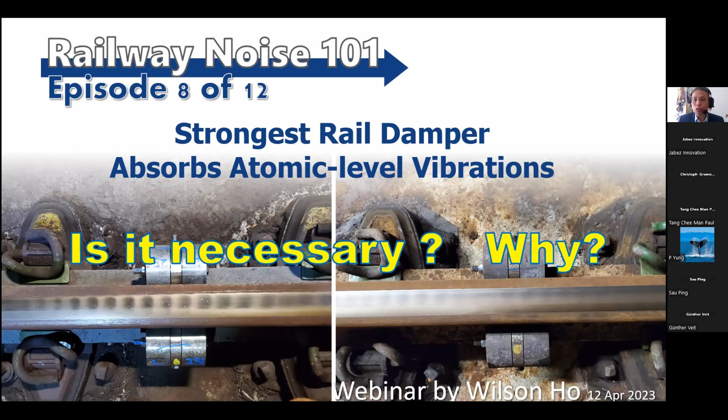It is not required to absorb vibration to atomic level. Nanometer level would be sufficient, quite enough. The real question we want to discuss today is how long it would take to make the rail vibration decay to nanometer level, or how quickly the rail vibration decays. Absorbing atomic level rail vibration would make the rail vibration decay faster.

Before we go into the content page, I want to show some noise data we gathered in the last 20 years, about noise level, undercar noise level, against the frequency of the rail vibration. In general, for noise radiation from rail vibration, we normally consider 400 Hz to 2000 Hz, because this is the major frequency band of noise radiation from the railway.

If we look at how much vibration creates noise level, you could not imagine that even atomic level vibrations already create the lowest noise level, around 30 to 50 dB. Nanometer vibration, talking about 1 to 50 nanometers, the noise level is loud but still acceptable.

Even in the sub-micrometer level, less than 1 micron, it is still acceptable, sometimes up to 1 micron, sometimes not acceptable. But once higher than 1 micron, the noise level is normally too loud and will lead to mitigation.

Before we go on to the detailed presentation, we want an idea of how small the scale of vibration displacement is, in micrometer or nanometer scale. Once it is more than 1 micrometer, the noise level is too loud.

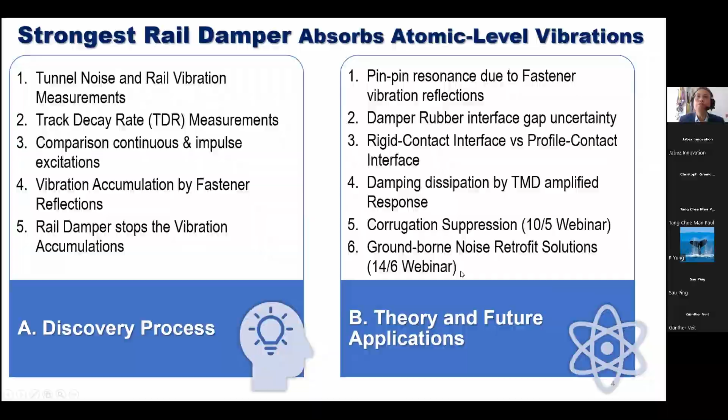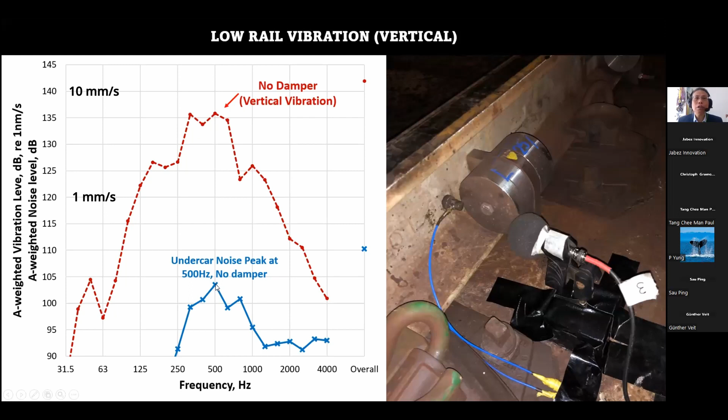This is the noise level, vertical vibration, from the sensor underneath the rail. It has a 135 dB vibration level, and the noise level peaked at 500 Hz. The lateral vibration from this sensor also has this peak at 500 Hz. So we designed a damper to fit on it and tune to 550 Hz for both vertical and lateral, so both vibrations would be damped by this damper.

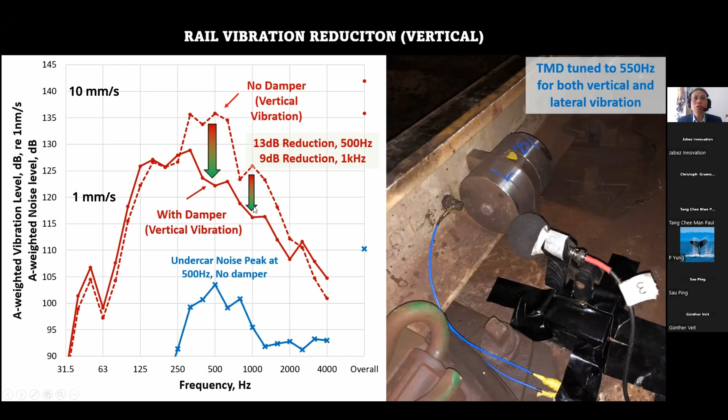Once we put the damper on, the 500 Hz vibration level decreased by 13 dB, and at 1000 Hz it decreased by 9 dB, even though it was only tuned at 550 Hz. For the lateral vibration, at this sensor location, there is a 17 dB reduction at 500 Hz and 13 dB reduction at 1000 Hz.

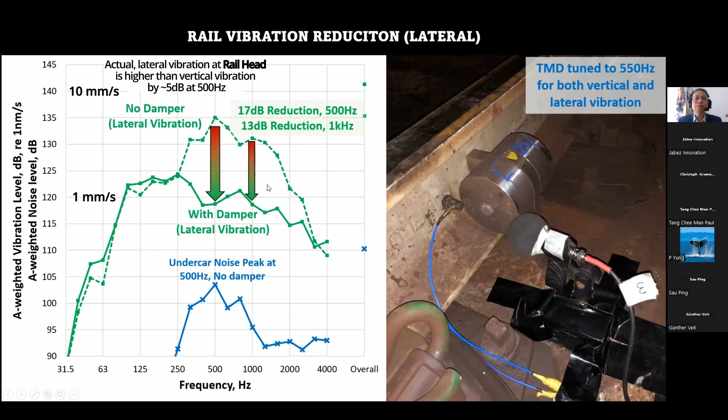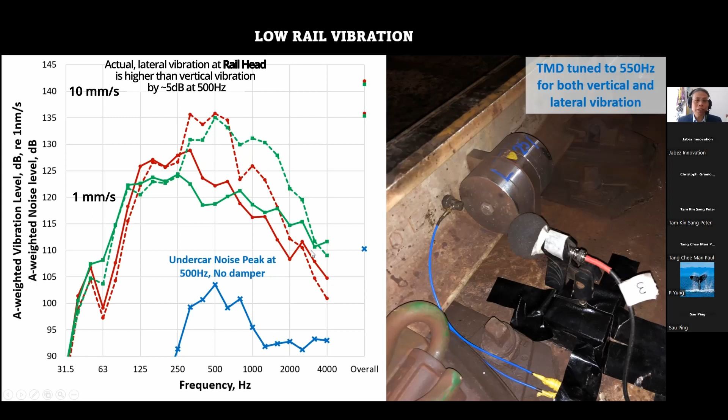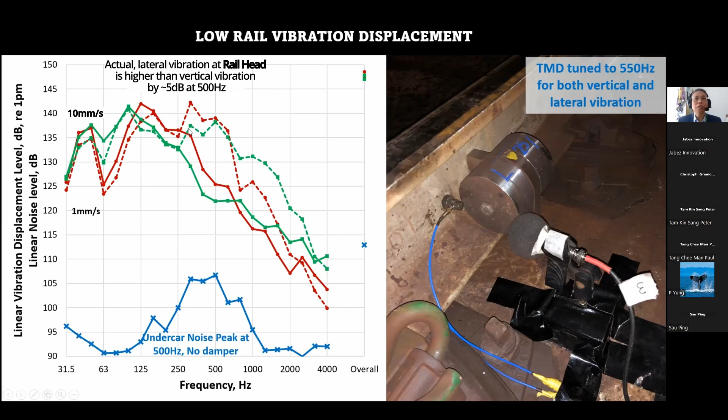This graph is the A-weighted noise level. The vibration level is also A-weighted. We change it to linear weighting, so this is the A-weighted vibration level converted to linear, and we can see in terms of vibration velocity it is quite high. But if we convert it to displacement, this is 1 micrometer, this is 10 micrometers, this may be 25 micrometers. So the vibration level, in terms of displacement, is in the micrometer range.

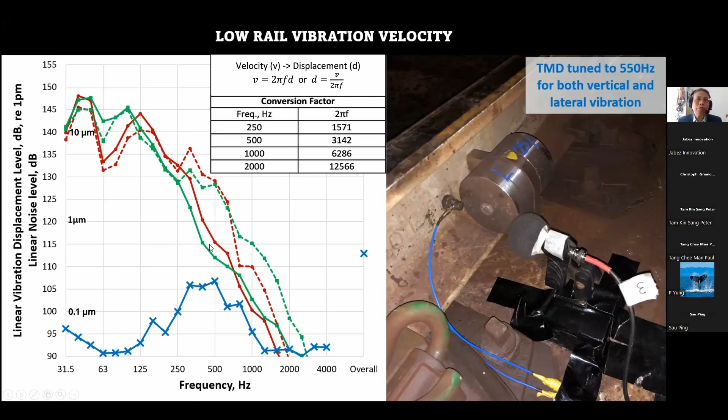If we're only interested in higher frequency, for example 500 Hertz and above, it is normally around 1 micron or less. Before applying the damper, the vibration level is more than 1 micron. With the damper, the vibration level is already less than 1 micron. So this gives you some idea of the scale.

The vibration level in dB can be expressed in displacement, velocity, or acceleration. The equation is very simple: dB in displacement is 20 log the displacement level over the reference level. The reference level is 10 to the minus 12 meter for displacement. For velocity, the dB is 20 log V over V reference, where V reference is 10 to the minus 9 meter per second. For acceleration it is similar.

We should notice that for displacement we use picometer as the reference. For velocity, we use nanometer. For acceleration, we use micrometer. So they are different - this is the practice of the acoustic industry.

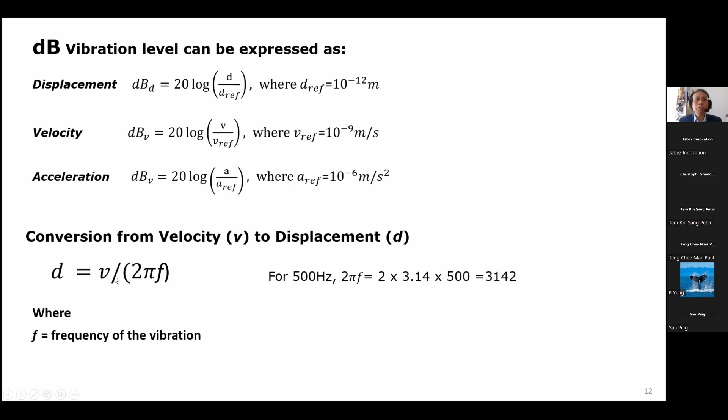Now we talk about how to convert velocity to displacement. If there is a vibration velocity, we just divide it by 2 pi f, then we get the displacement. For example, for 500 Hertz, 2 pi f is about 3100. So once we change velocity to displacement, the engineering unit is divided by about 3000. For example, if there was 1 millimeter per second, in the vibration level it was very high, but in displacement it's only about 0.32 micrometer.

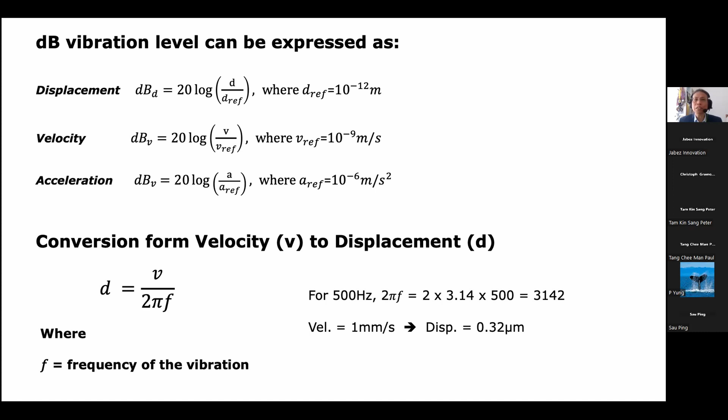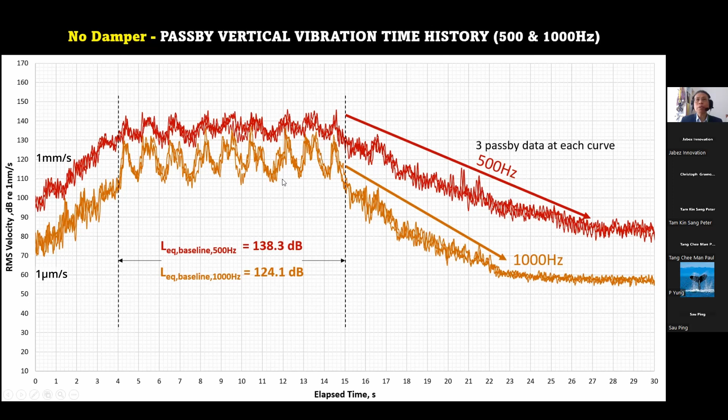Let us see more data. This is the vibration level with damper. We can see that once we apply the damper, the variation is much larger. This variation is according to the location of the bogie - at the bogie location, the vibration is very high, but in between the bogies, at the middle of the train car, the vibration is very low. So with the damper, it stops the vibration propagating from one bogie to another because it decays in the middle. In other words, the wave damper localizes the vibration, stopping accumulation from multiple wheels.

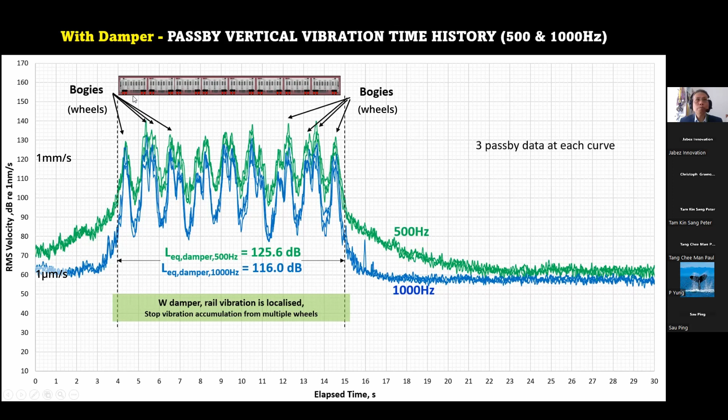Without the damper, the vibration stays at a high level for the entire train pass. But with the damper, the vibration is only high at the wheel location. Once the wheel moves away, the vibration level decays a lot.

We can see that in the middle of the train, the vibration is very low. So if a train has a wheel damper, sitting at the middle of the train would be much quieter than sitting close to the wheel. But without the damper, the levels are similar - the red line is without damper, and they're similar. Once with the damper, the blue line, it reduces the vibration a lot.

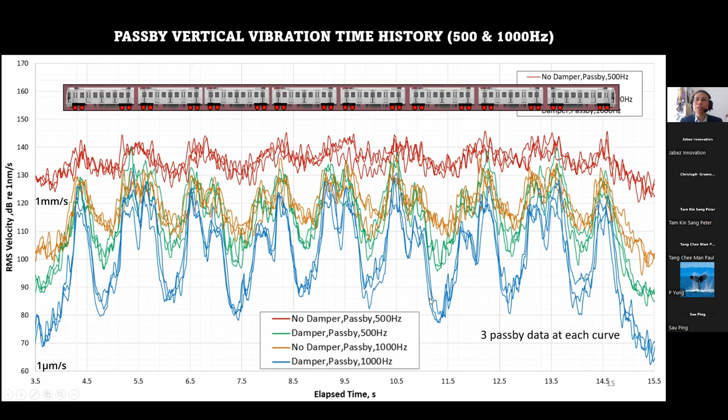This is all the data we are going to present today. It is quite complicated, so we will show it one by one.

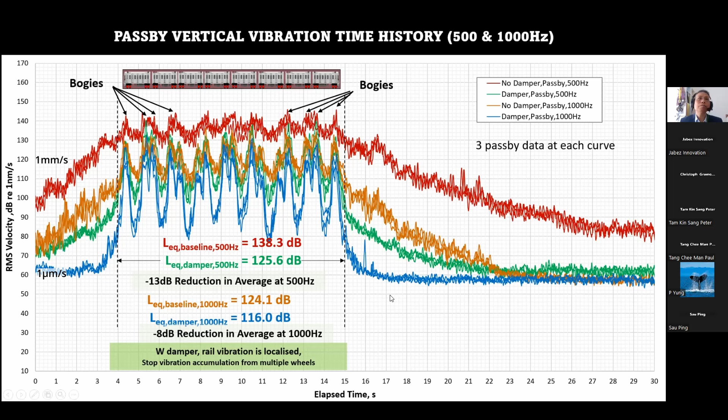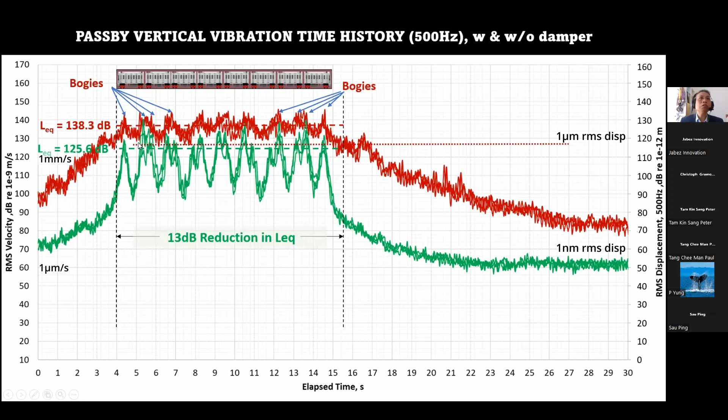If we look at the trough level - the locations in the middle of the train car - it is around 127 dB without damper. With the damper, the trough level is 96 dB. The reduction here is much better than the 13 dB, it's 31 dB.

Then we look at the displacement, using the formula to convert vibration velocity into displacement. We found we're talking about micrometer vibrations down to 20 nanometer vibration. So with the damper, we can reduce the trough vibration level to 20 nanometers. It also very quickly reaches the background vibration, which is less than 1 nanometer - a few atomic sizes of vibration with the damper.

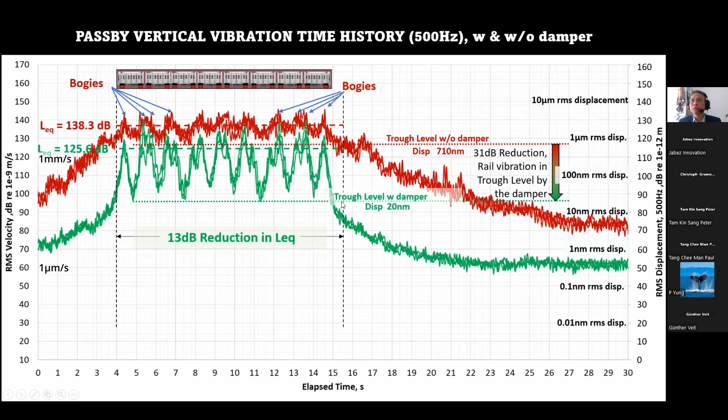So we can see the difference: without the damper, the decay is very slow; with the damper, the decay is very quick. Looking at the decay, we measured the track decay rate using the standard method, with a hammer and multiple sensors. We found the track decay rate is 1.8 dB per meter, and with the damper it improved to 5 dB per meter.

Although it looks very good, the decay is very quick, but we still haven't achieved the TSI target of 6 dB per meter. Our damper may have some strange effects such that the track decay rate measurement did not measure the decay damping dissipation by this damper. So very good decay, but only 5 dB per meter.

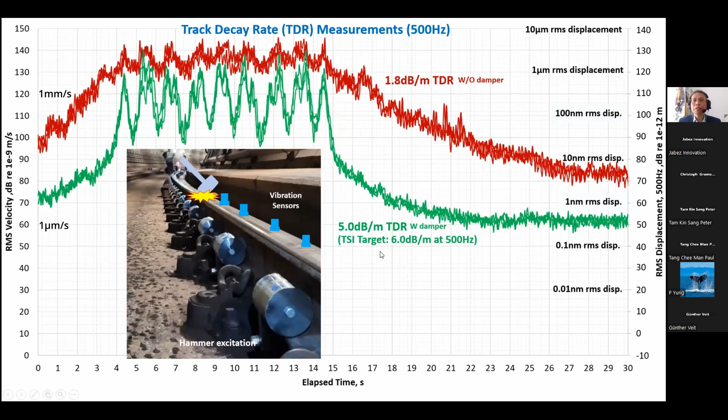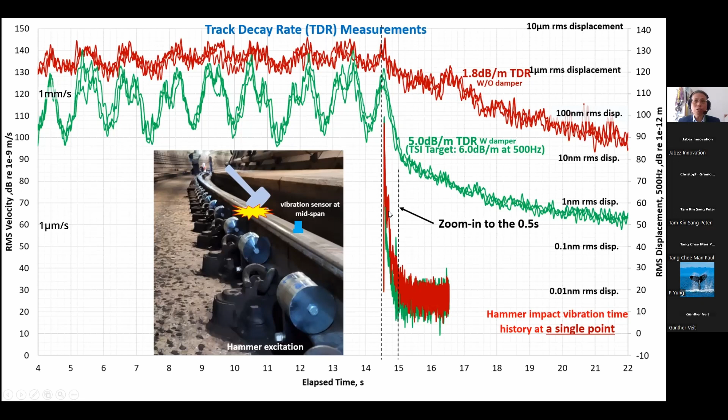We just take the data from the first vibration sensor and hammer on the midspan. At the midspan, we put a sensor to see how the vibration changes. This is the impact, it looks the same. The red line is without damper, the green line is with damper. Both decay very quickly.

This only takes half a second, less than half a second to decay. So we enlarge this half second, and we can see some difference. Even for the red line, it decays 30 dB, then there are some reflections. The green line is the decay with damper, the red line is without damper. This is the time - it takes 50 milliseconds to decay from here to there.

But we can see that they have a similar slope with damper or without damper. The difference is there are some fluctuations without the damper. With the damper, this fluctuation is minimized.

So what is this fluctuation? Why does the damper reduce this fluctuation? We investigated further and found that this is the vibration reflection from the fastener. It is less than 0.1% of the original vibration impulse energy, but it still creates ripples. These ripples make the decay very slow. With the damper, it makes a very quick decay and almost no reflection.

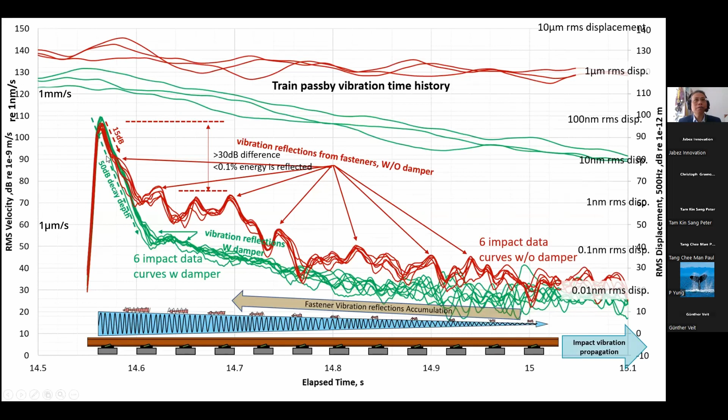Without damper, the decay is 15 dB, then there is some fluctuation. With damper, we have a very deep decay, 50 dB decay without reflection until there. Okay, that was 500 Hz.

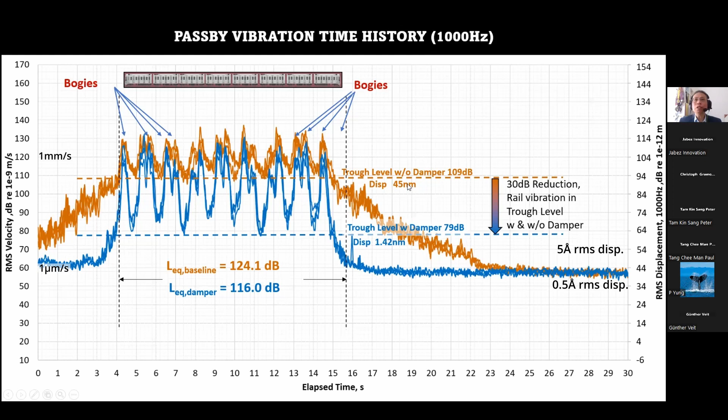If we look at 1000 Hz, they are similar. The trough level is reduced from 109 to 79, a 30 dB reduction on the trough level. The displacement is reduced from 45 nanometers to 1.4 nanometers.

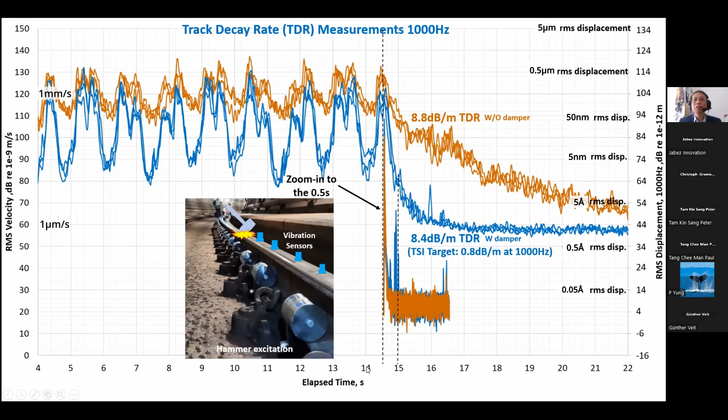We also conducted the track decay rate test. In this case, the track decay rate with and without damper doesn't change much. So we also enlarge this half second between 14 and 15 seconds. We can see that the first decay without damper, the brown line, has some reflections, some fluctuation. With the damper, it strictly decays 50, 60 dB without fluctuation.

So there is also some reflection from the fastener. What I mean by reflection is when we hit the rail there, the wave will propagate along the rail. Whenever it comes to a fastener, there is some small reflection coming back, and another small reflection coming back. These small reflections, however, are all in phase - they are in-phase reflections. So although the vibration is small, there are many of them and they are in phase.

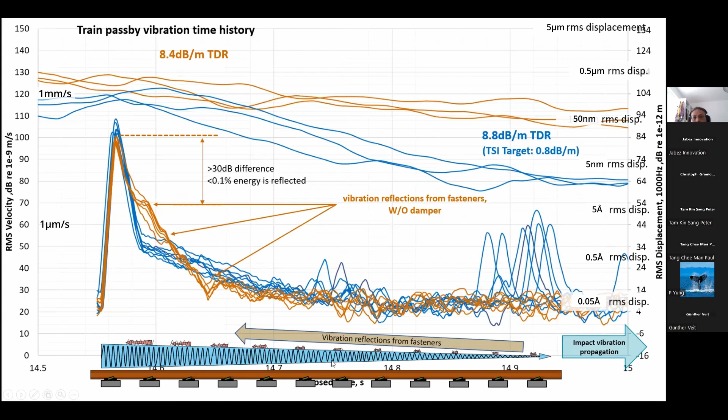We are going to see how this becomes the in-phase reflection. Okay, this is the most difficult slide in the presentation. We made it just a few hours ago to try to demonstrate some vibration propagation. This is the rail with fastener base plates at 0.625 meter spacing, which is normal in Hong Kong. Around 0.6 to 0.63 meter sleeper spacing is quite normal all around the world for new rail.

When we put an impact vibration there, the impact vibration would travel this way, on the right side and on the left side. If we plot different times, we can show this graph. We use T - T represents the time for traveling to the next space. So when time T passes, it would be at 2 baseplates going to this location.

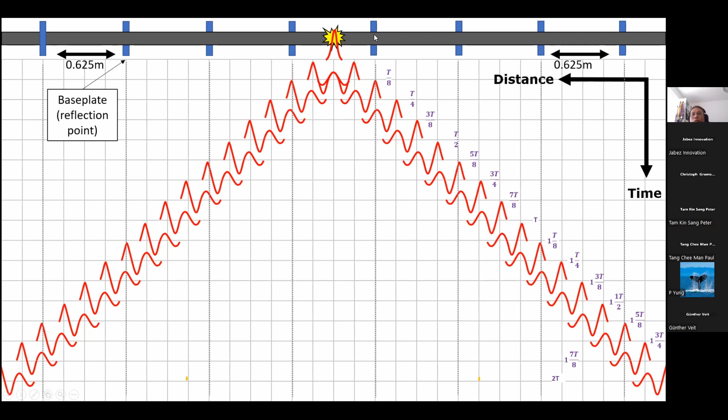This location is where the wave travels from this impact. And then at time T, the wave is traveling to this location. So every T, it will travel 2 baseplates. So this is the wave just propagating out. But whenever it passes through a fastener, there would be reflection - there would be reflection, so this is the reflection.

It travels through this fastener, across this fastener, and there is some reflection. And this is also reflection. By the way, these two reflections are in phase at the middle. And this is also in phase there, and this is also in phase there. So this in-phase reflection occurs at time intervals of T, the time for traveling to the next space. This figure was just made a few hours ago - I hope this can explain how the fastener reflects the wave vibration and how it becomes in phase.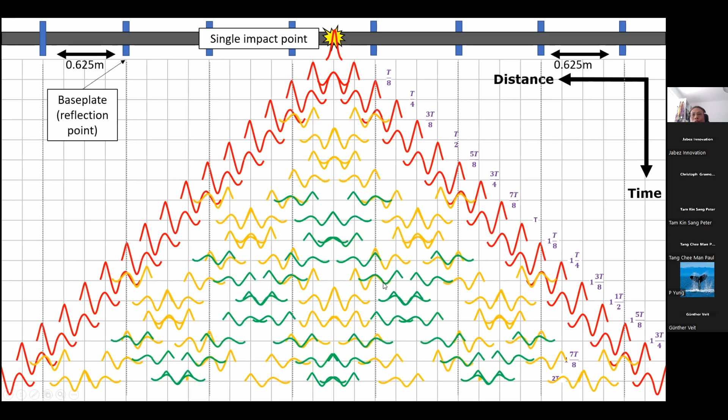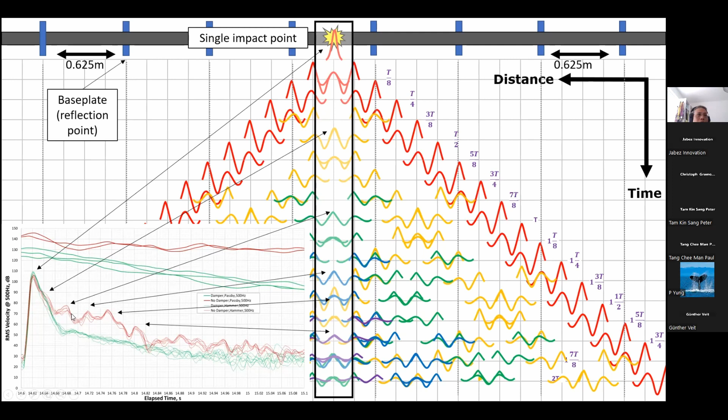More vibration and more reflection, and more reflection - this is just too complicated. So we believe these vibrations, the accumulation of in-phase vibration, create these ripples. The first impulse occurs, and then there is some vibration reflection from the fastener. The rail damper stops this vibration, and this reflection is on a very small scale.

With two wheels, in Hong Kong many trains have a wheelbase of 2.5 meters between two wheel sets. This is exactly 4 times the sleeper spacing, so they also create in-phase vibration.

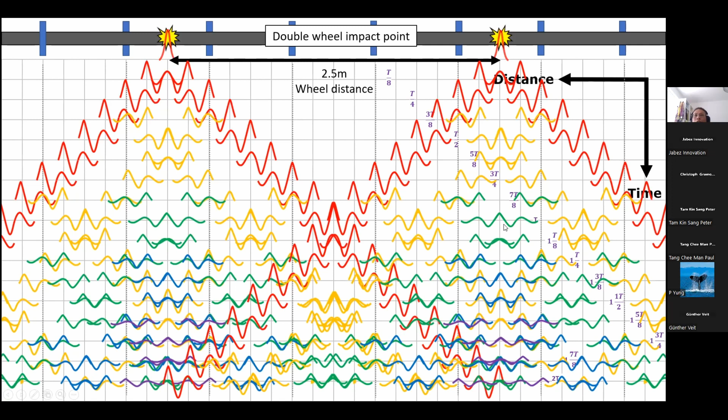Now we talk about the two types of rail dampers. One type is rigid contact, using metal contact to the rail, making sure there is no gap, because metal contact to metal is being rigidly in contact.

Another type of damper is profile contact. Normally they have a rubber layer at the interface, and most dampers use this design idea. This profile interface is designed to maximize the contact area to enhance the viscoelastic damping.

There may be some partial contact interface because when we put the damper there is some gap. It does not totally match the rail, especially when there is rusting on the rail. So there is a partial contact interface, and this partial contact interface would affect the damper performance.

It also provides vibration isolation between the rail and the damper, such that rail vibration energy does not transmit to the damper. This is the profile contact wheel damper. They need to make the damper very close fit to the rail surface.

This is the type of rigid contact. Rigid contact is designed to maximize the contact rigidity, so the contact is very rigid. This makes sure the rigid contact ensures effective transmission of damping force, and also ensures the tuned mass damping.

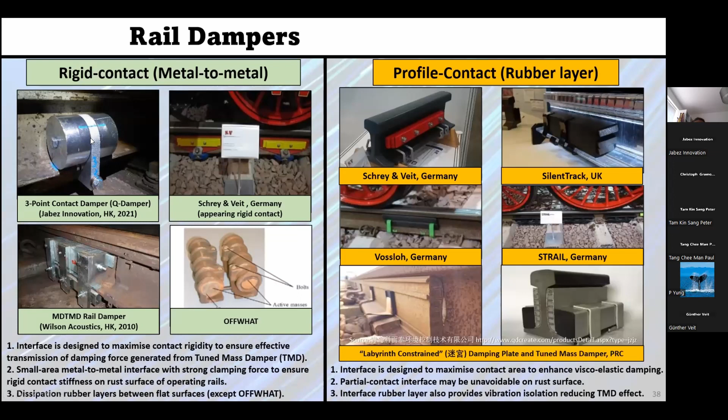A close-up on these two types of damper: the rigid contact with point contact, in this one is 3-point contact, making sure it fits well. The rubber layer is in between this plate and the cylinder. In this one they have metal inside the rubber to perform the tuned mass damping.

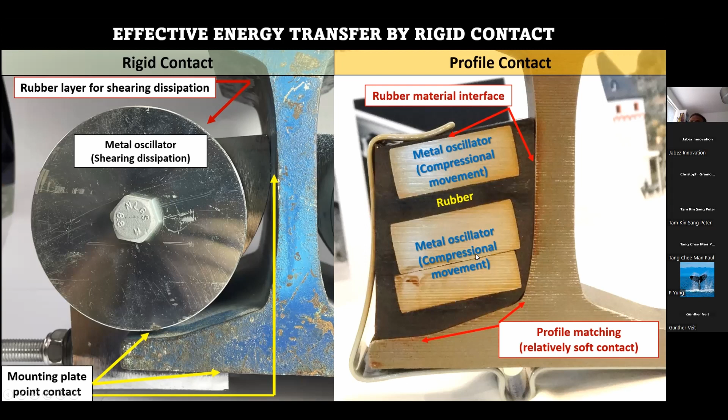So the rail damper normally would use tuned mass damping to enhance the dissipation. All rail dampers use viscoelastic damping, but it is spread broad and not strong. Some dampers include the tuned mass damping to amplify the hysteresis energy dissipation. They are strong but narrow band.

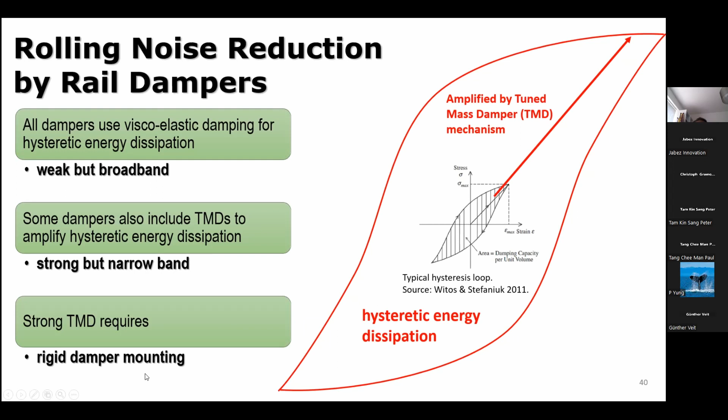Also, to control the tuned mass damping we need to control the stiffness, the effective stiffness of the rubber layer. So if we want a very strong TMD, normally we need a very rigid mounting in order to control the effective stiffness.

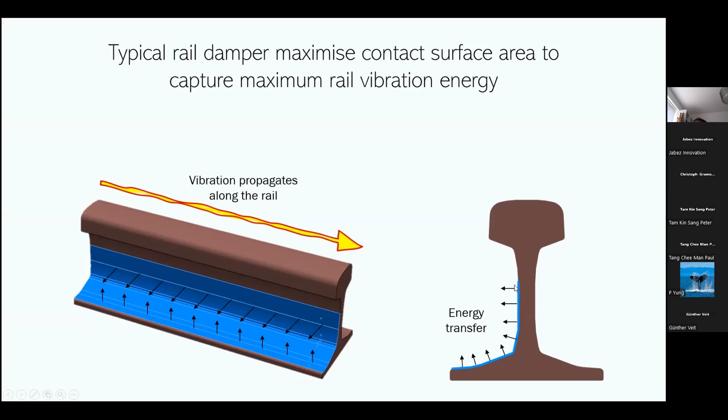When the rail vibration propagates along the rail, the energy would be dissipated if something touches it. So the profile contact tries to fit the damper to touch the entire rail surface, so whenever it propagates, the vibration energy will be transmitted into the damper. The vibration would be transmitted into the rubber as long as there is a very good profile fitting.

But in reality, such as this one, we can see there is a gap. This gap, even in micrometer or nanometer size, would affect the damper performance.

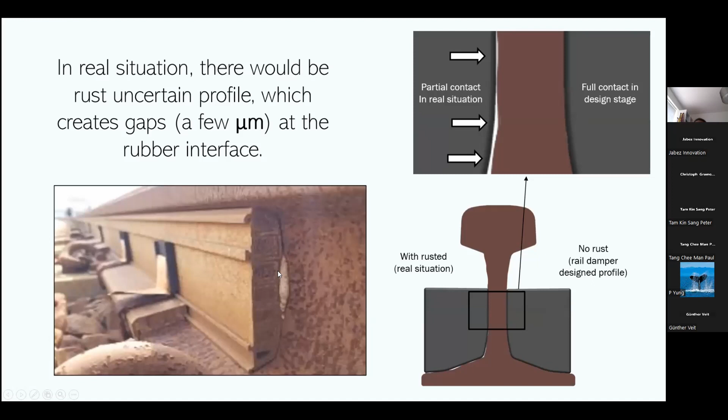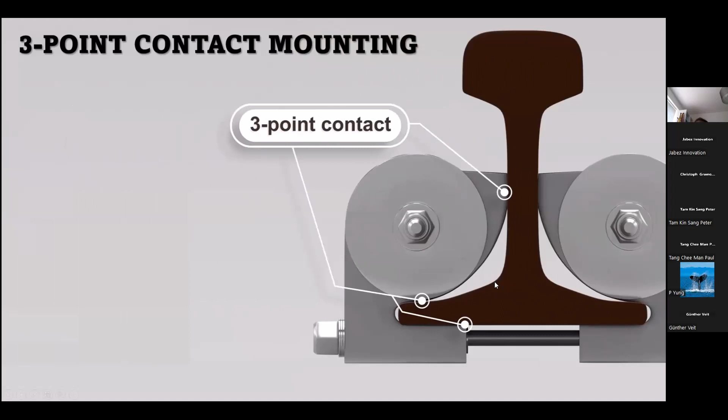Okay, it comes to the end of the webinar. Just looking at this graph again, it shows we need to control the vibrations below this level, below 1 micrometer, and make it decay very quickly to nanometer scale.

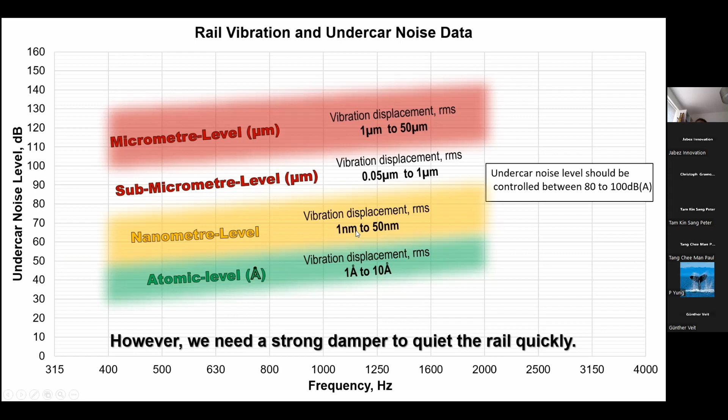Micrometer level vibration at high frequency is too loud, and we need to control it. Vibration control at the nanometer level is required. We need to absorb atomic scale vibration and make the rail vibration decay faster.

We need this to make a quiet rail. We need a very fast decay damper to decay the rail vibration. The rail damper can stop accumulation of atomic level vibration, and its interface gap, even less than a micrometer, affects the performance significantly. Check the decay rate — in our experience, decay rate may not reflect the actual damping performance.

In some cases we don't fully understand this, and we will further investigate this point. Vibration accumulation by fastener constructs the pin-pin resonance and affects the rail vibration decay.